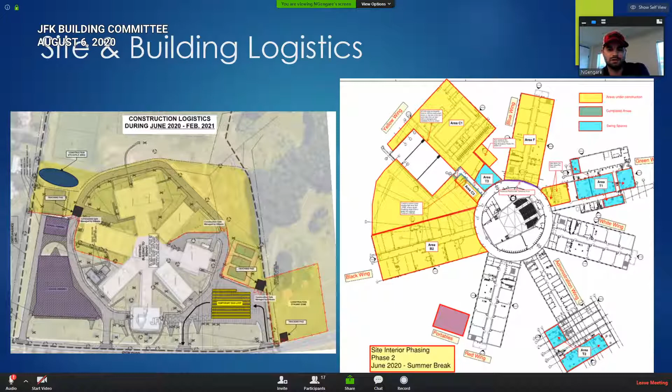So this is currently the phase that we're in on the project, the site logistics phase. We're actively in the F wing, which is the old blue wing, the yellow wing, which is the C wing, and the black wing, which is the B wing.

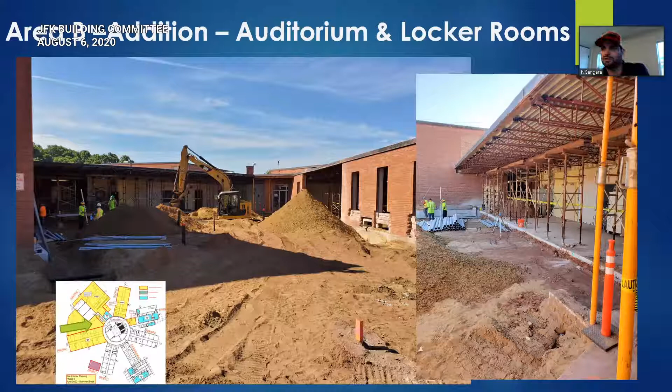These are current photos of the new auditorium. On the left photo, we have some underground utilities installed, some underground plumbing and storm drainage. We've also done some demolition of existing bathrooms to prep the site and get it ready for new steel, and we're currently pouring footings and foundation walls for that new steel. On the right photo, you see the wall that was demoed for the old existing bathrooms, and we have shoring in place, getting it ready to prep for steel that will be on site within the next 2 weeks.

This is just another angle of the same auditorium area B addition. As you can see, we're pouring some footings on the right photo, and on the left photo, we're actively installing conduit for underground electrical feeds to the auditorium.

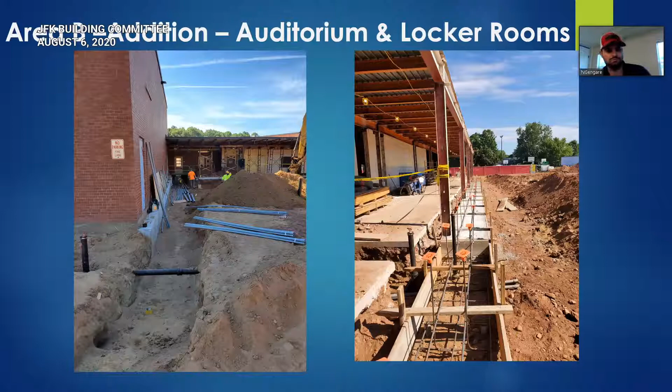This is the demolition of area B, which is the black wing. For those of you that are familiar, we have started trenching underground for utilities that are going to be run under the slab. On the right photo, we've taken out all the existing windows and done all of our abatement that is needed. That's where you see the brick that's missing underneath all the windows, that's all the brick that's been abated.

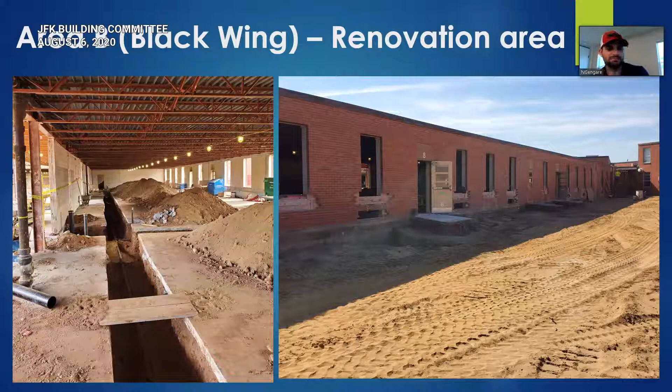The photo on the left is the future expanded cafeteria and fitness room, and the photo on the right is the future kitchen.

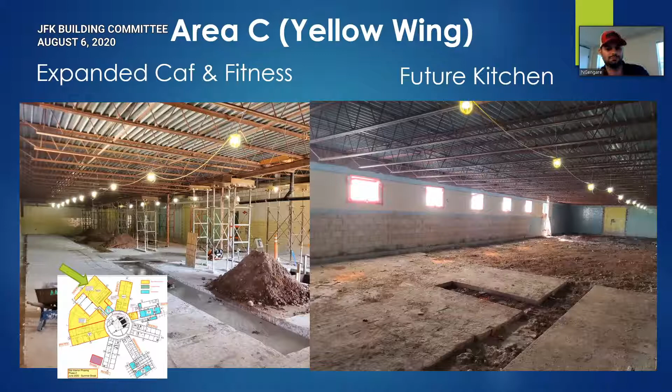This is a good photo. This is the old pool, obviously. As you can see, we're tearing it up, tearing down all the masonry, concrete, and tile that's in there. We've made large cuts in the exterior wall to get equipment in, which will eventually have new windows in place. This is the future cafeteria. What happens here is we remove all the concrete and then it gets infilled with structural fill, and then a new slab gets poured over this.

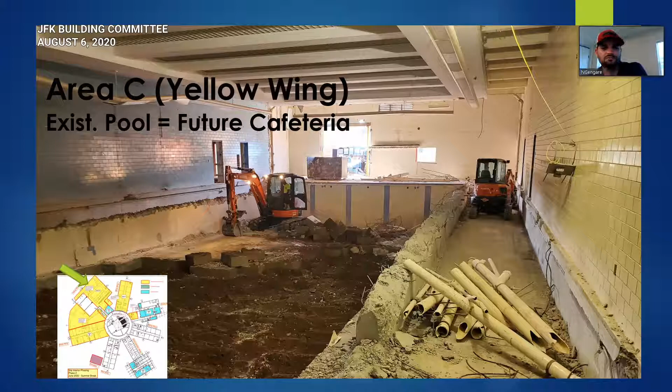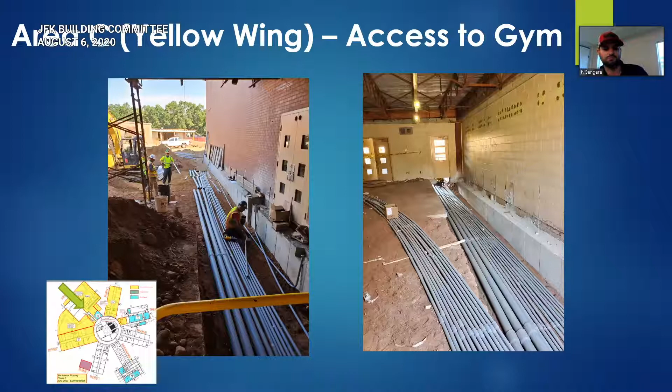Area C, this is just to show you guys we are putting in a lot of conduit right now from the electrical room, the new electrical room, which I'll show you in the next photo. This is all the underground that's cutting through the existing building that feeds the auditorium. So we have a lot of conduit going in place right now, and this is the addition of the C building, which is the yellow wing.

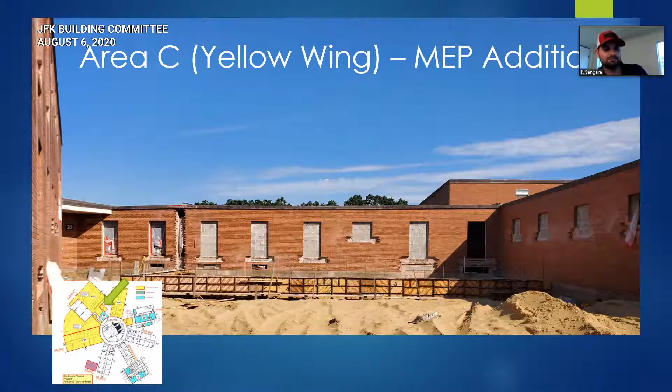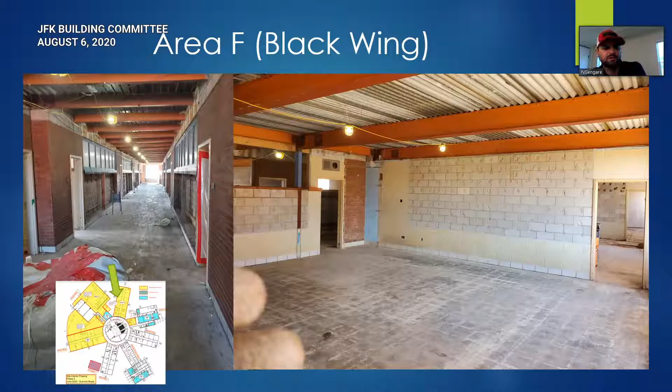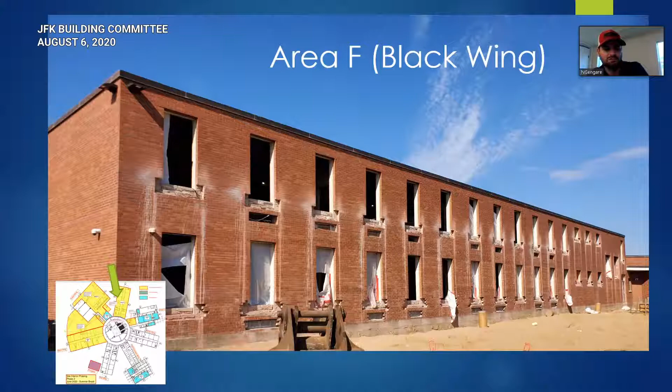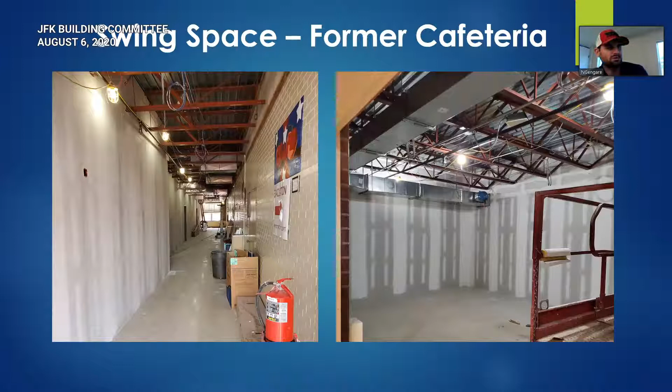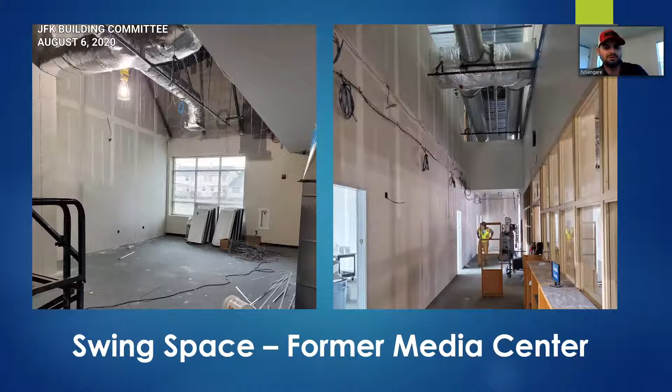So we're ready and on track to hand these spaces over to the school once school starts. This is the old former media center, area E, temp swing space. Again, this will be more classroom spaces temporarily. And that's another ALP temporary classrooms swing space.

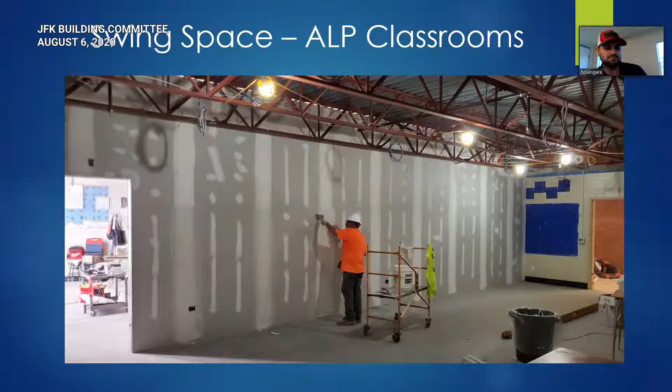So that's our update. If anybody has any questions, myself or Amar would be happy to answer. Does anybody have any questions? And you can see there's a lot of work going on.

So just as Bruce stated earlier, we are meeting with the design team, Chris, obviously CSG, on a bi-weekly basis, and RFI responses and submittals continue to come in. The team is working great together, maintaining progress on the job site, and really no issues to report. So if you have any questions, feel free to ask.

What's the question? On the excavating, has everything been going good? No surprises? Everything that we anticipated has been right on target? There's been some unforeseens, but nothing major. We're going to get into that in a minute, but for the most part, everything's been just as planned and as designed.

Right. One of the things I'd like to throw out there for the committee and the liaisons is I'd like to schedule a walkthrough with the building committee and the liaisons. Normally we would have a lot of publicity and allow groups to go through the building because it is a town building, but unfortunately with this situation we're in, we're going to have to do a scheduled one. I would like to get, within the next 3-4 weeks, a walkthrough for the building committee members and the liaisons, so the liaisons can bring it back to the councils and the boards, and the committee members know exactly what they're doing and looking at when we show these slides and drawings.